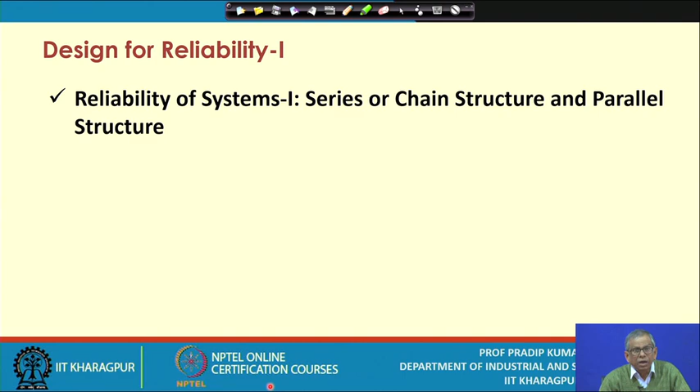Prior to discussing these two aspects, let me refer to an example. In the previous lecture session, if you remember, we discussed at length the probability distributions for reliability modeling. There are different kinds of probability distributions you may assume, and we have discussed those typical distributions normally you come across in reliability modeling. Now we'll cite one example, and then we'll be discussing the reliability of systems. This is a typical example, so let me go through it.

A mechanical system has demonstrated a Weibull failure pattern. That means time to failure distribution is assumed to be Weibull, and already we have discussed the Weibull distribution with a shape parameter of 1.4. That means the value of beta is 1.4, and the scale parameter of 500 days. So what is the scale parameter? Scale parameter is essentially referred to as theta.

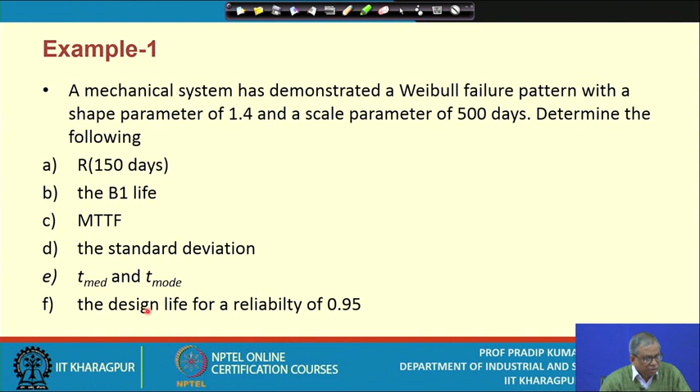Determine the following: the reliability that the system will last for 150 days - that's the sort of notation we use - the B1 life, MTTF (mean time to failure), the standard deviation of the time to failure, the median time as well as the mode time to failure, and the design life for a reliability of 0.95. So these are the aspects to be looked into.

So referring to the first question, we determine the reliability with 150 days survival of the system. We use this particular formula: R(T) equals e to the power minus T by theta to the power beta. We have already derived this expression, so you apply this formula. If you apply this formula, you get a value of 0.8308. That means the reliability that the system will run for 150 days is 0.8308.

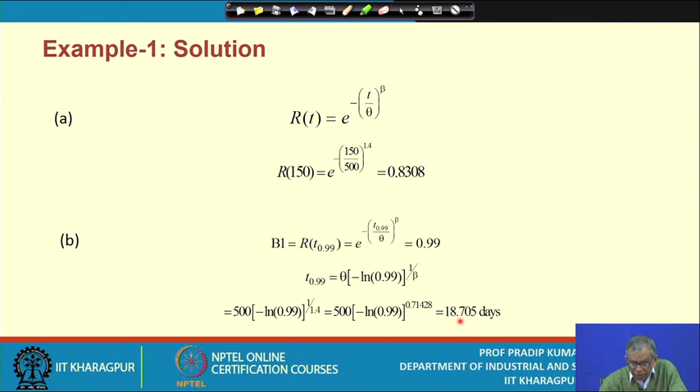The next part is the B1 life. We have already derived the expression for this, we have defined what is this B1 life. So directly you apply this formula and you get a value of 0.99. Then T at 0.99, that is another expression we have already derived. Please refer to all these derivations, and when you apply this formula you get this value, that means 18.705 days.

We calculate MTTF, mean time to failure. This is theta times gamma function of 1 plus 1 upon beta. We have already derived these gamma functions, and this is theta, so this is essentially 500. So 500 times gamma function of 1 plus 1 upon beta. What is the value of beta? That is the shape parameter, 1.4, and you get a value of 455.286 days. So that is the MTTF.

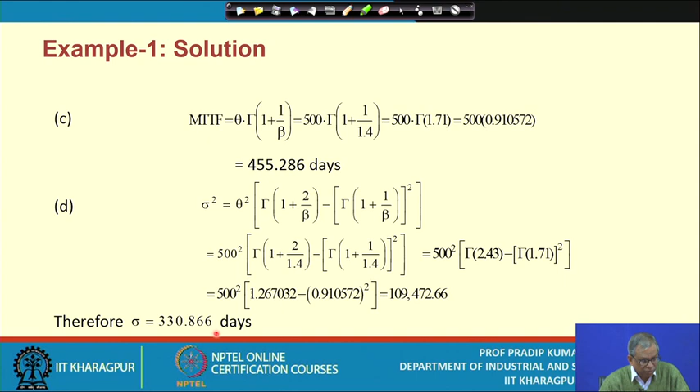Similarly, we calculate the variance. We use this formula, and we get a value of 109,472.66 - that is sigma square. So the positive square root of the variance, that is the standard deviation, that is 330.866 days.

So you know the formulations. In these examples, what we are trying to do is, you have the corresponding data and you are trying to determine all those parameters.

So this is the t point at 0.5, that is the t median. Again we apply this formula, and the t median is 384.836 days. Similarly, the t mode - again we have derived this formula - and when we have all these values, you get the value of t mode as 204.336 days. And the TD, similarly, you have these expressions for TD, and you get a value of 59.92.

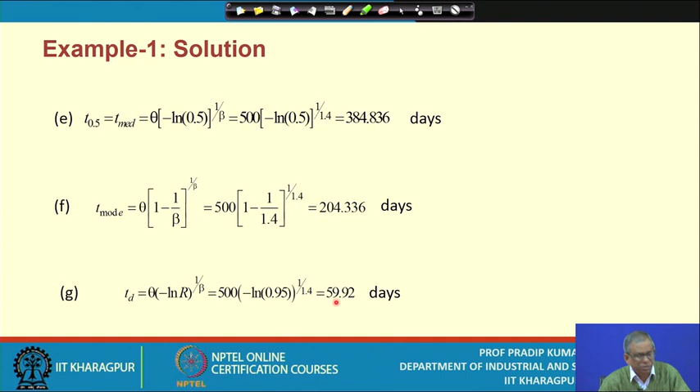So this is a typical example. There could be many other such examples, numerical problems, we will be dealing with those in subsequent sessions. So this is just one application. You have been deriving many kinds of mathematical expressions while you go for reliability modeling of a system. So this is just a numerical problem related to some of these formulations. Now let us discuss the reliability of systems.

Okay, so this is part 1, and in subsequent lecture sessions I will be referring to part 2 of reliability of systems, because you come across various kinds of systems, varieties of configurations, and it is your attempt to go for reliability modeling for all such systems.

Now, the components, units or subsystems within a complex system can be related to one another in series, parallel, series-parallel combinations, or meshed structures. We may come across several such structures while configuring a system, or any combination of these. So this is the idea about the system structure, or the system's configuration.

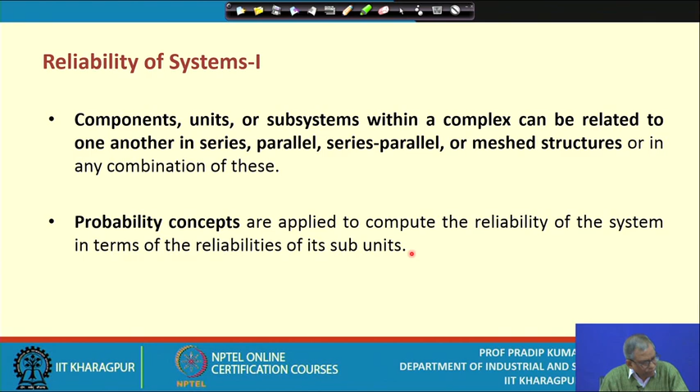So we have already referred to a particular term called product structure tree, and prior to the product structure tree for the given system, you must know what is the bill of material. This document you actually get from the design department. So now the first type of system you come across is referred to as the series system, or the chain structure.

Now the question is how to measure reliability of a series system, or the so-called chain structure. In a series or chain structure, all components must function for the system to function. That means the system must run. Under what condition does it run?

Because it consists of several components, and all the components must run simultaneously, then only the system will be running. Like a missile system, it may consist of around 4,000 or 3,000 components. It's a very complex design, and essentially this is a series structure. That means to get function from a missile, you need to assure that all these thousands of components are so reliable that none must fail at a particular point in time. If just one component fails, the entire system breaks down. So that sort of event must be avoided. This is the condition.

Is it clear? If the series system component failures are statistically independent, that means for each of these components, it has its own time-to-failure distribution, with its own parameter values like different mean values and different standard deviation values. So the function of one component is in no way affected by the function of the other components. We may assume that they are all statistically independent.

Then the reliability of the system, with notation RS for a series system, R subscript S with non-identical components, is given by RS equals the product of Ri, for i equals 1 to n, where n is the number of components or subsystems, and Ri is the reliability of the ith component or subsystem. So you must know the individual component reliability or individual subsystem reliability. This is the expression — it has to be a product term. So this is the reliability of a system.

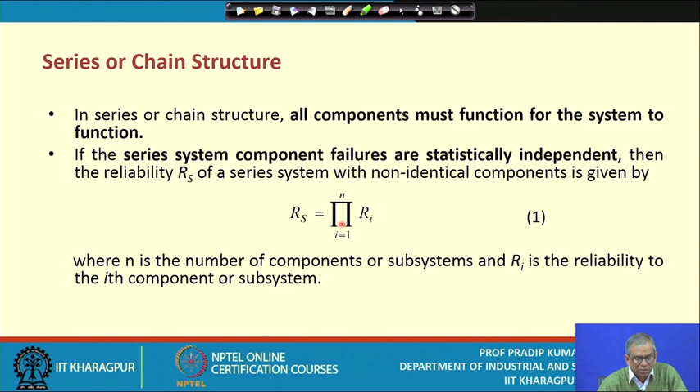So this is a typical figure related to the series or chain structure. So you have say 4 components over here.

They are in series, and all are interrelated. You get the effect, and there could be several causes, and there could be several types of effects, so you must be able to monitor. That means the causes of running this system, and what could be the effect of running these series systems, you should be aware of. There could be many problems, and you need to identify the sources of these problems.

So what you can do, for such a system, if you face a lot of problems, like say problems related to failure, you need to identify the sources of the problem as well as the types of the causes. So you may use several kinds of tools or techniques for identifying such causes.

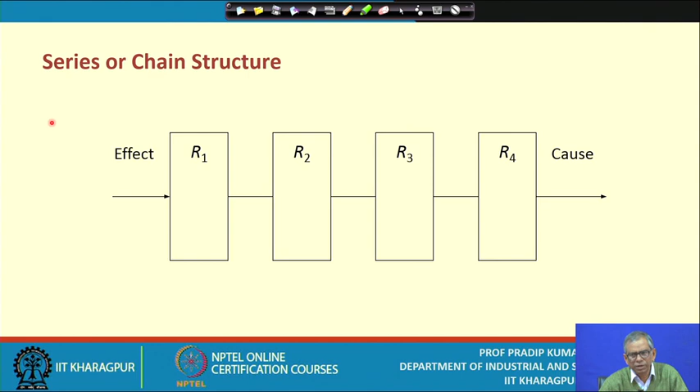If the failure times of the components are exponentially distributed, what does it mean? That means you have created the system including all such subsystems or components, and now all these components are basically in the useful life phase. They are not in the burn-in phase or in the wear-out phase; they are in the useful life phase.

So if all these components are in the useful life phase, you may assume that the failure rate is constant, and if the failure rate is assumed constant, you may assume that the time to failure distribution is exponential. This point we have already elaborated: if the components have constant failure rates, this point I have already mentioned.

The ith component reliability is e to the power minus lambda i t. So what is lambda i? That is the failure rate for the ith component. And you are trying to compute the reliability for the t time period, meaning I am assuring that the component will be surviving for the t time period.

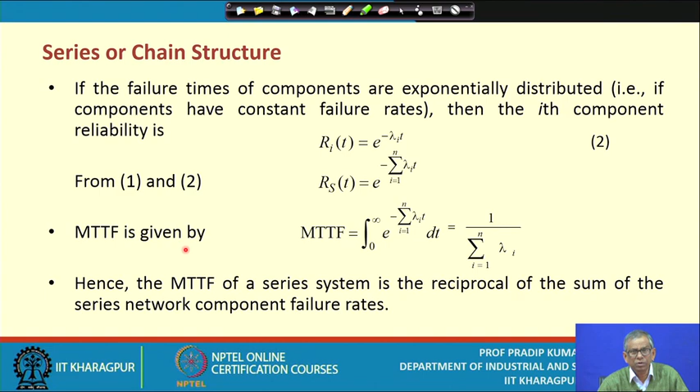Now here is an example. Let me discuss this example; this is a typical numerical problem. Determine the minimum allowable component reliability to attain a system's reliability of 0.95. That means the system's reliability is pre-specified for a series system. The kind of system mentioned consists of 2, 3, 4, 5, 6, 7, 8, 9 and 10 identical components.

That means a series system may have just two identical components. How do you define identical components? With respect to the failure rate, identical means that for both items the time to failure distribution must be the same, and similarly the parameter value of the distribution that you assume must also be the same. In other words, in this case the failure rate is also the same. That's why they are referred to as identical.

So for n identical components in series to attain a system's reliability of 0.95, in general each component must have a reliability of 0.95 to the power 1 upon n. That is directly applying the formula linking the system's reliability with individual component reliability in a series system.

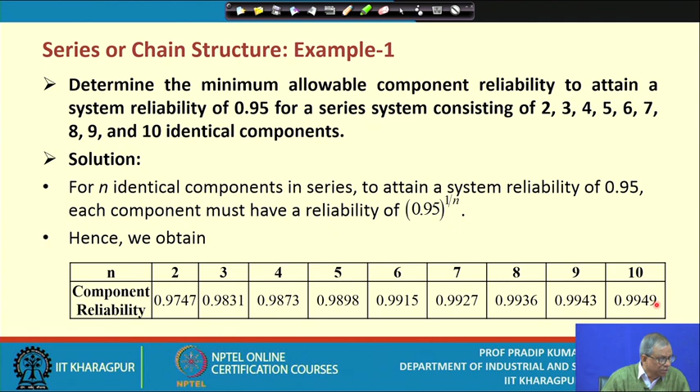Okay, so this is a typical example. Now the next example, let me take up.

A complex system has 600 components in series. You will come across several sorts of complex systems, and the complexity of a system can be defined from several perspectives. One perspective is the number of components. So here we are just considering the number of components indicative of the complexity of the system.

So here is a system with 600 components in series. You can well imagine that while you select all these components, you must make sure that all these components have a very high value of reliability—that is to be ensured.

Now obviously, before you use a particular component in a system, while you manufacture the system, you must also have a prior idea of what could be its possible reliability. That means you must be able to estimate it. So how do you estimate the reliability of a component?

There are procedures. In subsequent lecture sessions on reliability, we'll be discussing those aspects. For the time being, we assume that the reliability estimation procedure is known, and the value of the reliability of a given component is also known. The reliability of each individual component is 0.998.

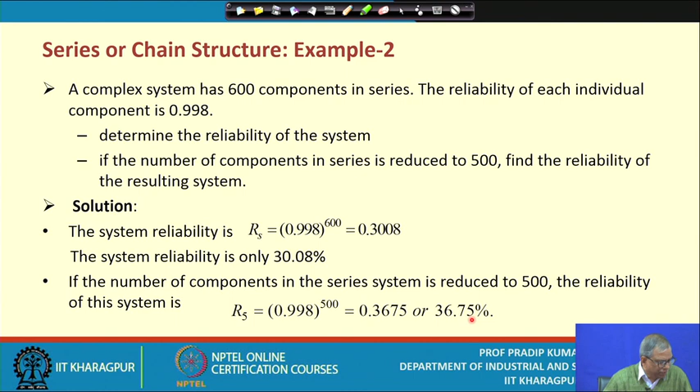Now, what is the parallel structure? As an alternative to series structures, you have another pure structure called parallel structure. These systems will fail if and only if all the units in the system fail. The assumption is that not all system units are active and load sharing—that is the basic assumption. That means to run the system, at least one subsystem or one component must run. It is assumed that the component failures are statistically independent, like in the previous case.

So 1 minus Ri is essentially that it will fail. All the components will fail with individual component probability 1 minus Ri, for i equals 1 to n. This is the product term, and when you subtract this product term from 1, you get the parallel system's reliability. Where n is the number of units, Ri is the reliability of the ith component. So 1 minus Ri is basically the non-reliability, or failure, in a period of time.

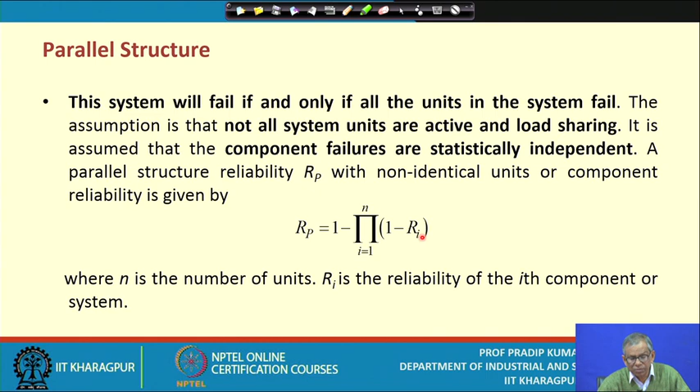Now here one basic assumption we are making is that the reliability value remains same over time. Usually it is not so - the reliability actually becomes a function of time. Here we are assuming that the value of reliability at a particular point in time remains same for all the time period. We will revisit these assumptions later on.

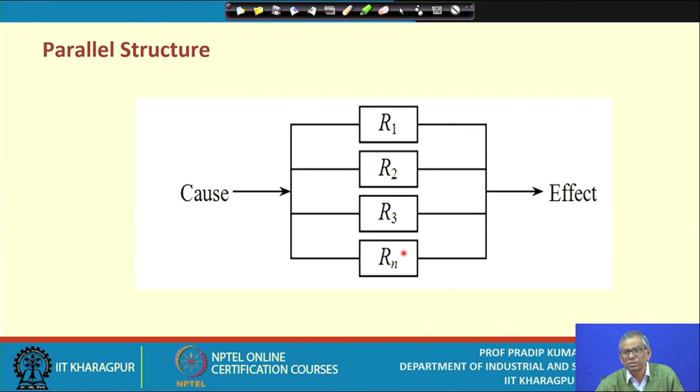So this is a typical structure, that is cause and effect - these are the components you have. How many components? N number of components. This is basically the configuration - this way you represent the configuration. That means the system will run only when any one of these components runs. That is the basic condition to be ensured.

So if the component failure rates are constant, then this is the expression for the reliability over the t time period. Obviously the failure rates are constants, that means lambda i for the ith component, in the useful life phase, all the components are in. So this is the expression, because the individual reliability expression is e to the power minus lambda i t - exponential time to failure distribution.

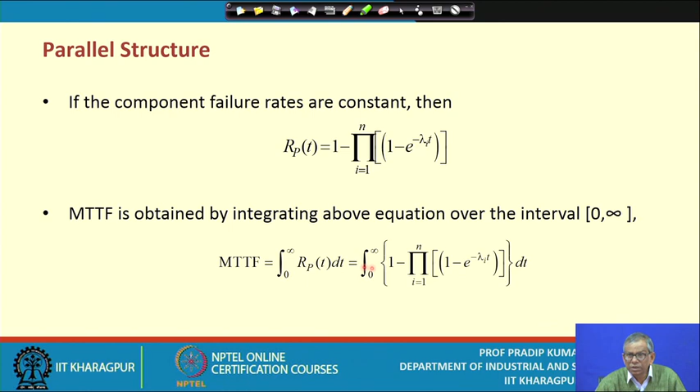Similarly we compute MTTF, with these expressions: integration 0 to infinity of Rp(t) dt. That means essentially you calculate the mean value, starting from the fundamentals. So these expressions you can use - the Rp expression is already there, so it is replaced with this one, and then you get this value. MTTF further you can manipulate, simplify these expressions, and ultimately you get these expressions.

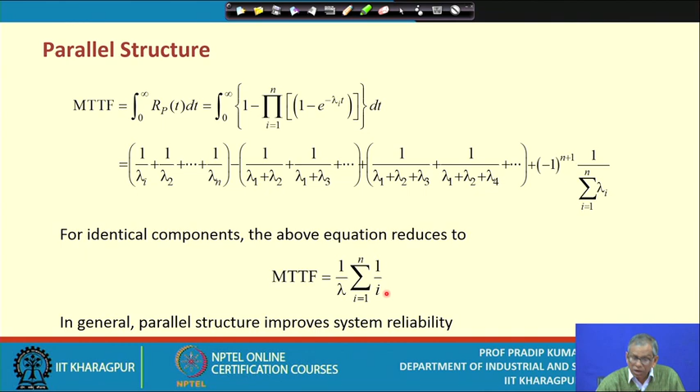For identical components, the above equation reduces to this one - MTTF equals this, which is a particular case, this general expression. So note it down: this is the general expression, and a particular case is when you deal with identical components, that means all these components have the same failure rate. So the MTTF expression reduces to 1 upon lambda, sigma i equals 1 to n, 1 upon i.

In general, parallel structure improves system's reliability. That means obviously if you ask for design improvement, you go for the parallel structure from the series if it is feasible. So here is an example.

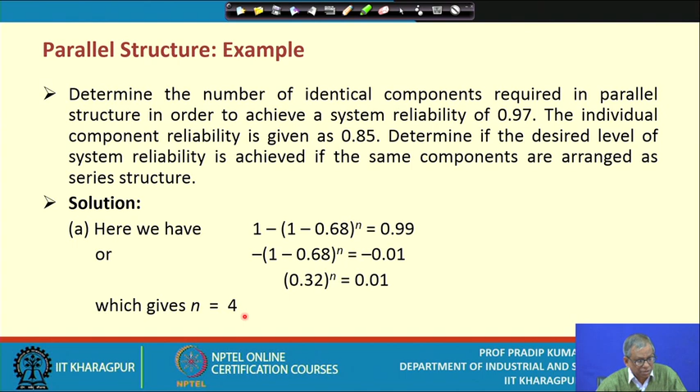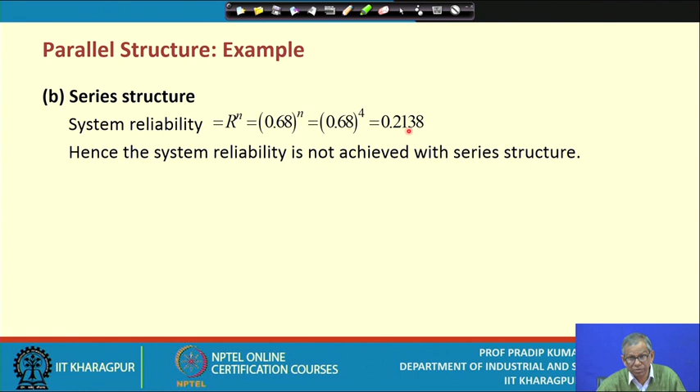Determine the number of identical components required in a parallel structure to achieve a system's reliability of 0.97. The individual component reliability is given as 0.85. Determine if the desired level of system's reliability is achieved if the same components are arranged as a series structure - that means a comparison with the series structure. So here we have this value, 0.99. Ultimately you find that with 0.97, you get a value of n equals to 4. So this is the expression, and for the series structure the system's reliability is r to the power n, 0.68 to the power n, that is 0.2138. It's very less - hence the system's reliability is not achieved with the series structure.

So this is one example. I conclude this - we have referred to two kinds of systems, the series systems and the parallel systems. In the subsequent lecture sessions we will be taking up several examples, and one particular system we always come across is systems with standby, the standby components. That part also we will discuss in the subsequent lecture sessions.